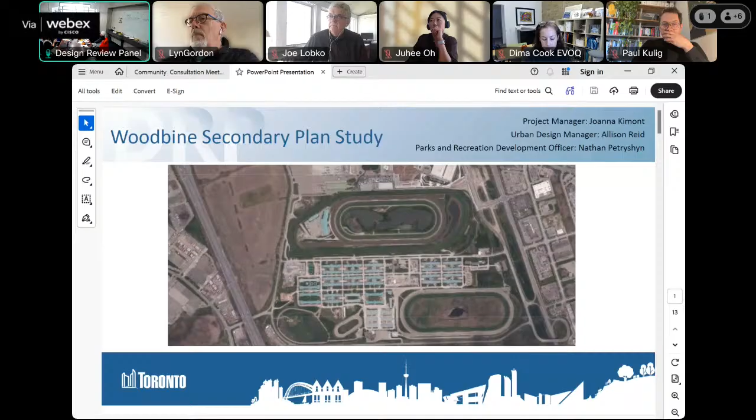To provide a quick overview of exactly why we are doing this study and how the study is being undertaken: it is undertaken by City Planning, and the secondary plan study specifically focused on the southeast corner of the larger lands that are commonly referred to as the Woodbine lands. Those larger lands are bounded by Highway 427 on the west, Rexdale Boulevard on the north, Highway 27 on the east, and the rail corridor towards the south.

In terms of the overall history to describe why exactly we're here today, it's important to first highlight that the entire Woodbine lands were previously designated in the city's Official Plan as employment areas. In 2023, when the city was undergoing its last comprehensive municipal review, various landowners were putting in requests to convert their employment lands to sensitive uses. The owner of the Woodbine lands had submitted a request for the entirety of the Woodbine lands to designate them from employment lands to mixed use or regeneration areas.

Later that year, City Council had adopted Official Plan Amendment 653, which considered the various comprehensive review land requests or land conversion requests. In the case of the Woodbine lands, it converted just the northwest corner of the Woodbine lands, and retained the southeast corner as in the previous employment lands designation.

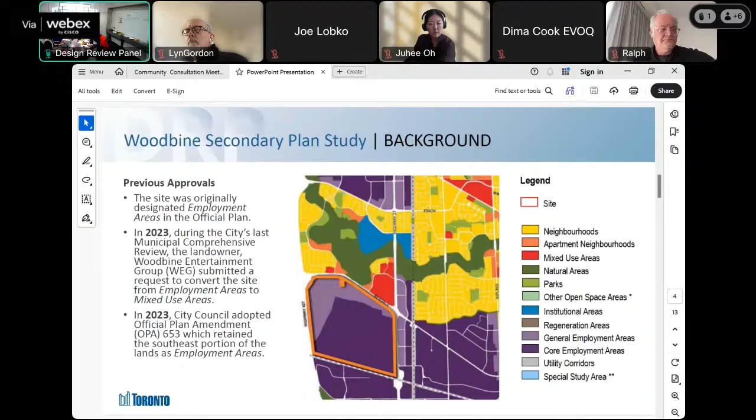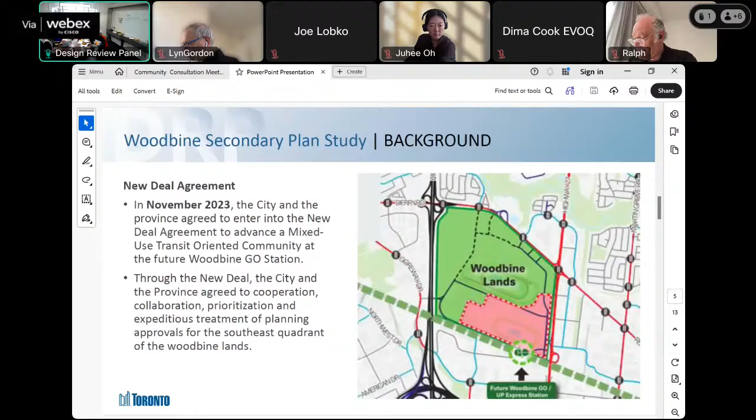However, in November of 2023, the city had reached a New Deal agreement with the province that considered a number of big moves across the city, including the Woodbine lands and some other areas focused on introducing new mixed-use transit-oriented communities. The focus on the Woodbine lands in particular was based on the catalyst of the development of the new Woodbine GO station. Through the New Deal, the city and the province had agreed to cooperation and collaboration, and really an expedited planning process to consider a new land use designation on the southeast quadrant of the Woodbine lands.

In January of last year, the Minister of Municipal Affairs and Housing approved modifications to the original OPA 653 to allow the change of uses in the southeast quadrant of the Woodbine lands to mixed use areas and regeneration areas. This was done in coordination with the Site and Area Specific Policy 896, which helps redesignate these lands. The key area identified as regeneration areas is represented in brown on the map before us.

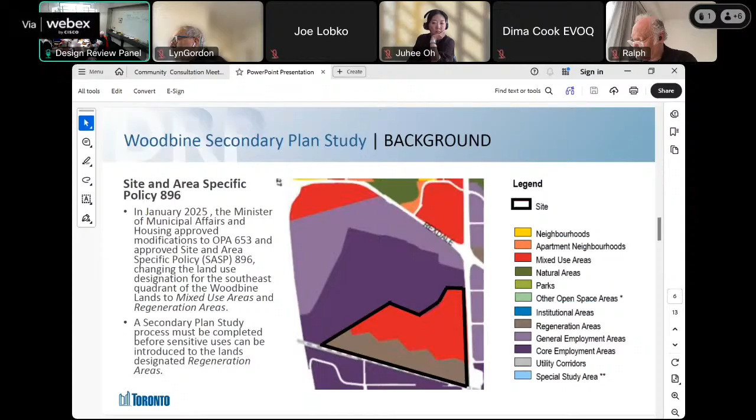The Site and Area Specific Policy specifically states that before any sensitive uses can be introduced to the regeneration area, a secondary plan study has to be completed. And so that's where we are today.

In terms of the overall secondary plan study process, this began in November of last year. Through the New Deal agreement, there was an agreement between the city and the landowner Woodbine Entertainment Group that Woodbine will be submitting all of the supporting and background materials to support the city's secondary plan process. Those materials were received by the city at the end of November 2025, and that was the initiation of our secondary plan study process.

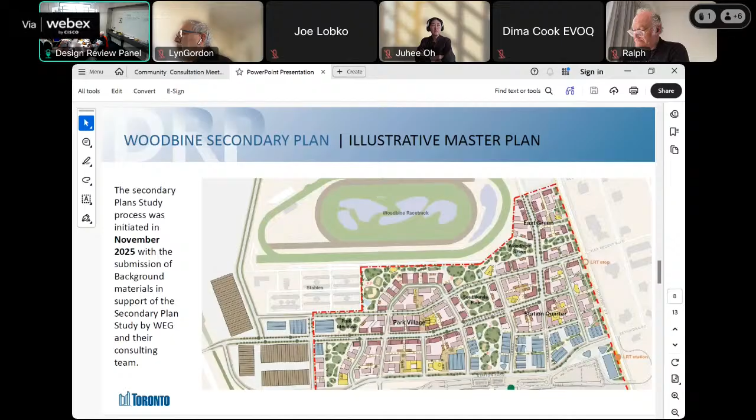In terms of where we are with the overall phasing of the study, we're just completing phase one, which began with the initiation of the secondary plan study upon receipt of those materials. We are in the process of establishing key principles to help guide the secondary plan. Those key principles were initially presented to us by the Woodbine team and are really the framework of how we're approaching a lot of our review of the materials.

Those will go into greater detail when we have the proponent's presentation. We're in the process of collecting our population and demographic data to determine the types of community services this area will need, and we are also assessing the infrastructure and transportation needs. There is a concurrent infrastructure master plan and transportation master plan being worked on alongside the secondary plan.

Part of phase one, we also just completed a set of community engagement earlier in March, and community engagement is intended to continue throughout the process of the secondary plan.

We are now entering phase two, where we're analyzing the various alternative options, particularly related to the infrastructure and transportation master plans. We're developing the draft vision statement and key secondary plan directions that will be reflected in an interim report intended to go to the May meeting of the Etobicoke York Community Council.

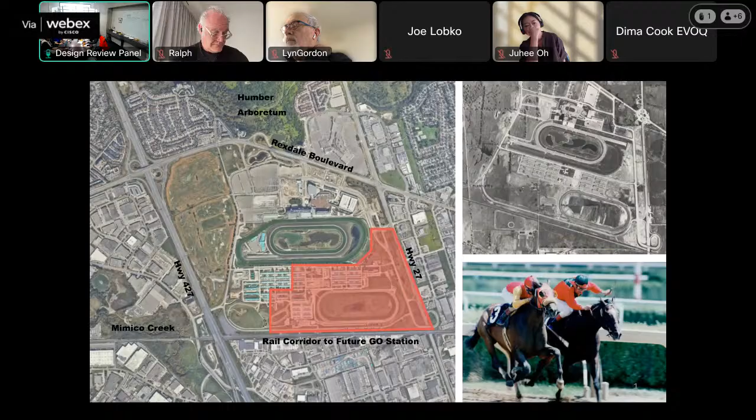Today we will be discussing the southeastern portion of the site, which is within the secondary plan study. There are also ongoing plans to the northwest, and in the southeast that will be in parallel. The idea is that ongoing development all supports horse racing operations for its future within the site and across the campus.

This is conceived alongside these other respective neighborhoods that are to be connected in the wider Woodbine site area, but also beyond. Having a variety of mixed uses is important in the coherent plan for all of the site area, with horse racing at the center. This is a cultural institution that has had a long history in Toronto and for the site.

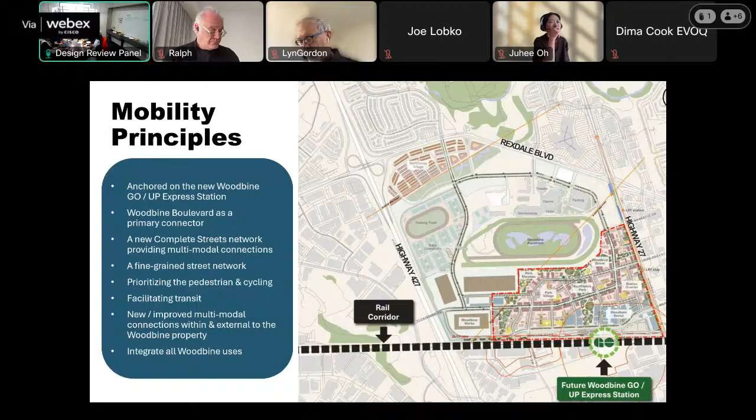Working with BA Group and the wider team, we have set forth a number of mobility principles. This was included in the preview deck. In the interest of time, I'm not going to go through all of the bullet points, but that is working in concert with the infrastructure master plan, as well as the environmental assessment, as well as the design for the master plan.

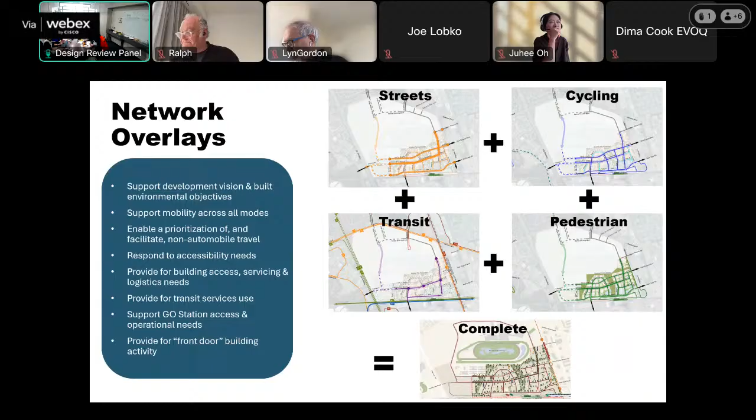There are a series of in-depth network overlays that we're looking at in terms of pedestrian-focused street networks, cycling, and transit, to come together as a complete network and a complete community. These parallel processes work with the TMP and the EA, thinking about not just within the secondary plan boundary, but as wider reaches within the Woodbine site and beyond.

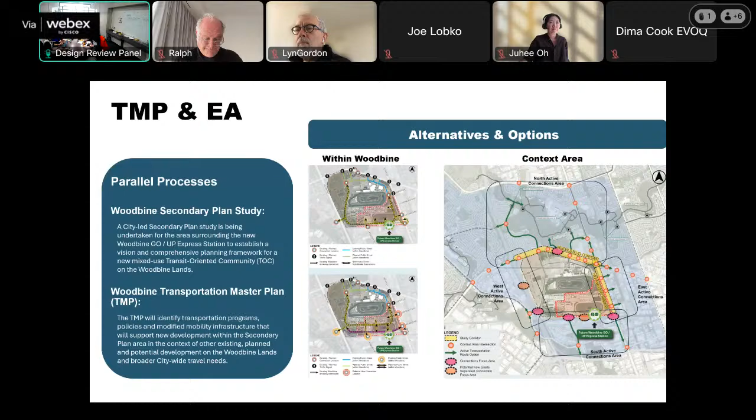So today we're focusing on this southeastern quadrant. I will describe the 3 neighborhoods that form that quadrant, and how the street network and the network of parks and open spaces work together to create what we see as a long-term legacy for the site.

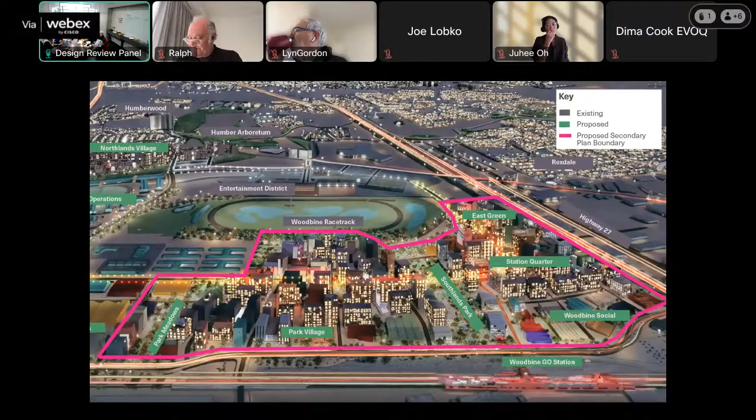As Joanna stated, we have been working together on really a charter of 7 principles, thinking about open spaces, the parks and squares, and creating a balance between natural and built elements, grounded in Indigenous principles that we're listening and learning about. Alongside that, there is a connected network of streets, routes, and thoroughfares to foster the urban life that happens in these communities.

It is important, as a site of this size will be developed over many years, that the blocks are rational, the right size, and the streets are the right widths. We're looking at diversity to be resilient across the neighborhoods, being flexible, and also being complete at every stage to minimize disruption, but in particular, for Woodbine itself, to be a place of its place.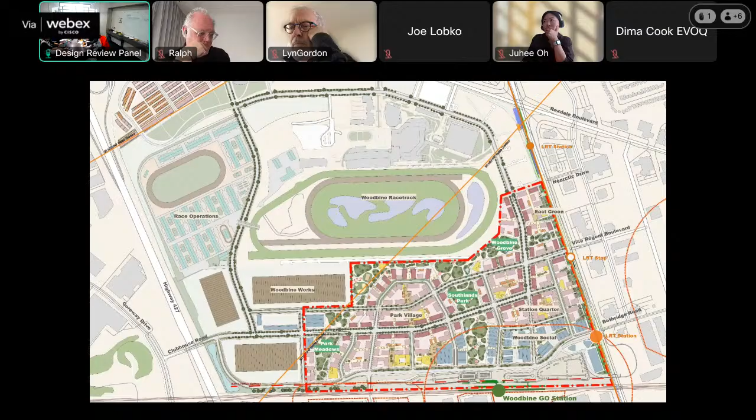As touched on, there is a limitation in height. So this is a great opportunity to deliver mid-rise communities that are mixed. We have a limitation of 16 stories, but we're not proposing 16 stories throughout. We are looking at a mix of typologies ranging from low-rise all the way up to about 16 stories.

Back to the open space network, the parks work in concert with a number of smaller green spaces and pocket parks, as well as mid-block connections. The idea is that the pocket parks and more intimate, smaller green spaces offer a different quantum of space, when we envision the variety of activity, not just general games programming, but also enjoyment as family parks throughout the seasons and throughout the year.

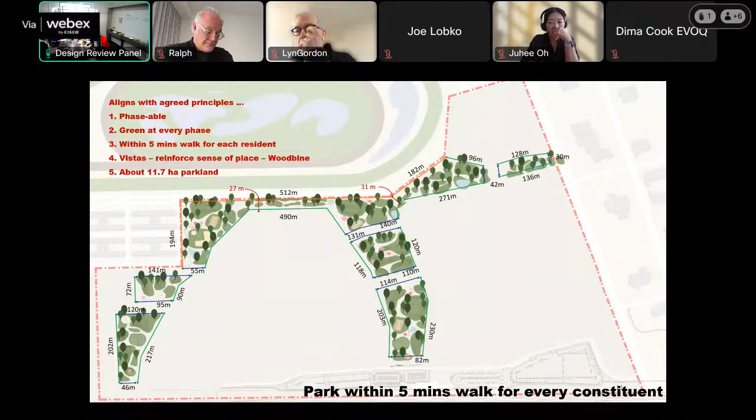We will come back to this slide. There is a set of dimension slides we can review if the panel wishes to delve into more detail. But the idea is that each of them will be within a 5 minute walk. This isn't set in stone, but it's an attempt at envisioning how these parks would work, how it would work in terms of programming, informal play, and the scale, from a tennis court to an American football field, and how it fits in these parks.

We're looking at a park average width of about 150 meters across in depth for the main Southlands Park. And it's not just about how it's programmed above grade, but also how it works below, thinking about stormwater drainage and that ecosystem working throughout, with geothermal incorporated across the site.

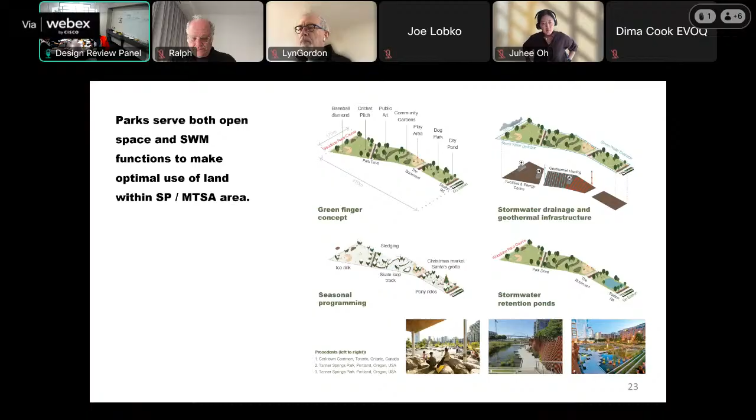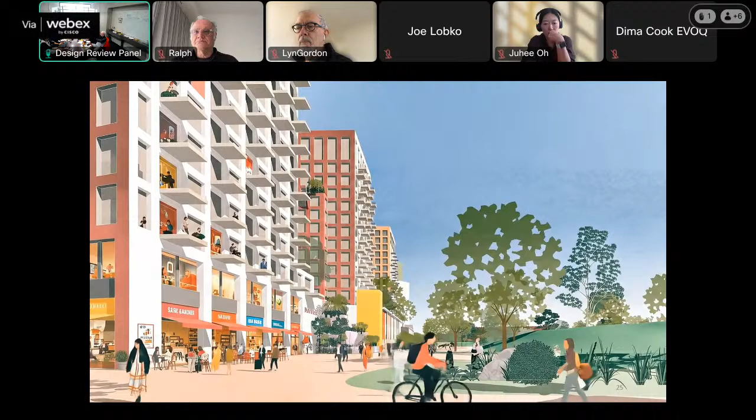We're really thinking about a new way of enjoying these parks, not just driving up and parking against it, but also encouraging walking along the edges. So we thought, to best optimize the site, we are looking at public footpaths not being encumbered by parking for the development plots. I'll go into more detail about the depth of the ribbon block typology that interfaces the park.

Alongside Woodbine Boulevard, in concert with the parks, we're looking at pocket spaces which could be civic squares that also have sustainable foundations, thinking about how that works with the transit network, those green connections, and integrating blue-green infrastructure.

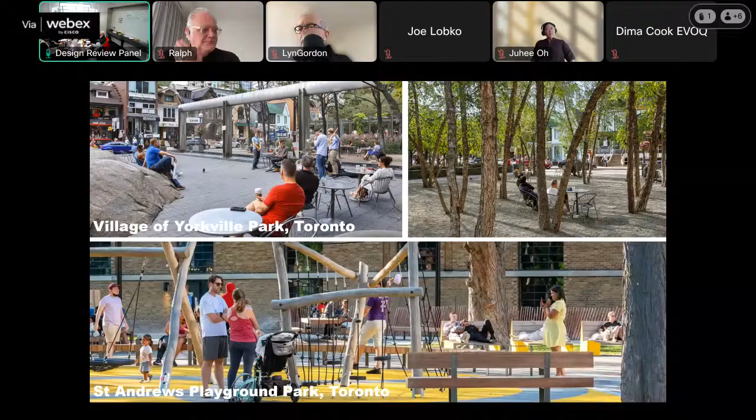That also extends to the smaller, more micro parks, local pocket parks, thinking about small children, daycares and nurseries, and how these smaller, more intimate spaces would be more appropriate for the neighborhood, working with the city staff team to dedicate some space nestled within the neighborhoods for that. Toronto has a history of very successful parks that work really well within the urban context.

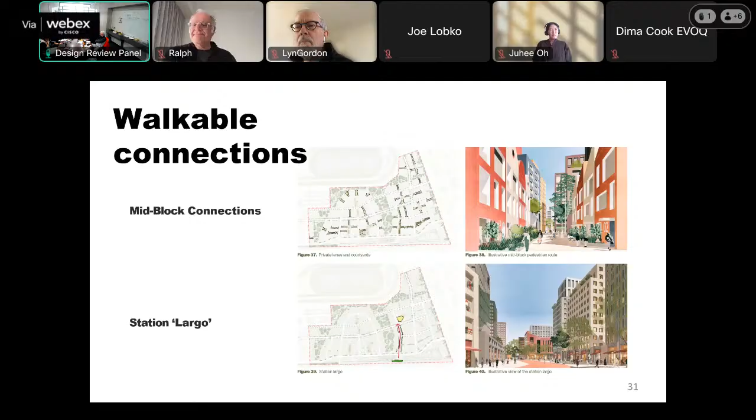Linking those pocket parks to the larger park are mid-block connections, intimate connections between the urban blocks, but also a significant one, the Station Largo, which connects Woodbine Boulevard to the station itself. This is an illustration of that more intimate mid-block connection that encourages cycling and pedestrian walkability across those neighborhoods.

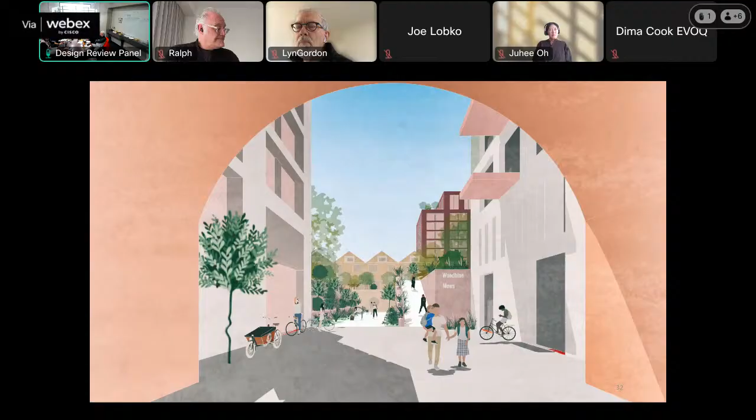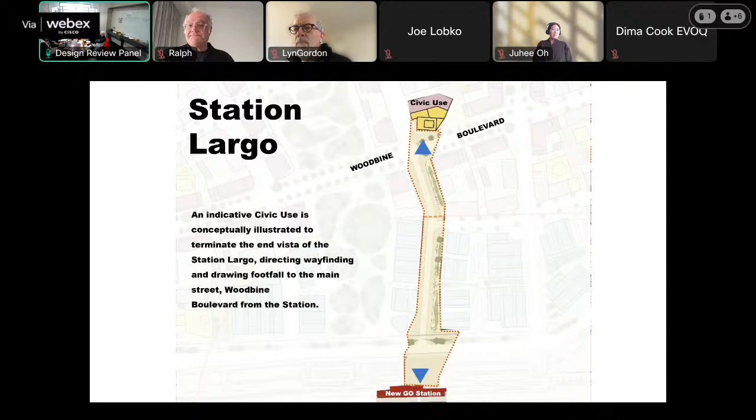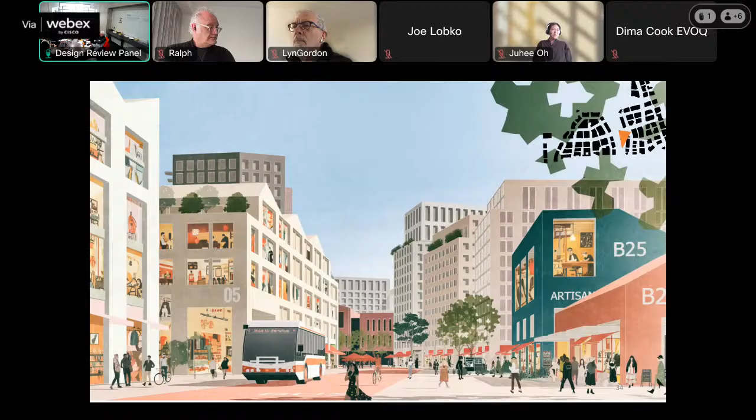For the more civic piece, the Station Largo is really trying to anchor two pieces of civic built form, having civic use at Woodbine Boulevard as one goes from the station towards the Boulevard. This is an illustration of what it could look like, encouraging the use of transit and walkability.

Of course, this is bolstered by thinking about the hierarchy of streets. Not only do we have Woodbine Boulevard, but working with Alan and the team, thinking about local streets, this Park Drive towards the north, and service streets, station streets towards the south, all connected together with a loop road, which forms what we call a petal, one of the urban structures of these neighborhoods.

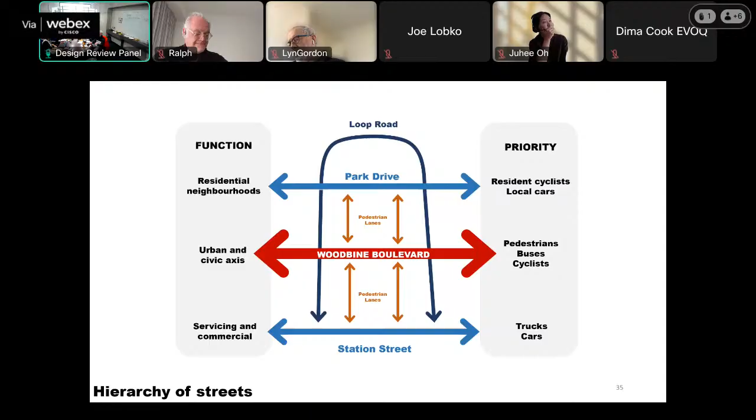There are more intimate pedestrian lanes that knit between these three spines across the neighborhood. In right-sizing the width of those streets, we thought about the hierarchy: Woodbine Boulevard being the widest at 36 meters, the transit mall at something like 23, and local streets down to 20.

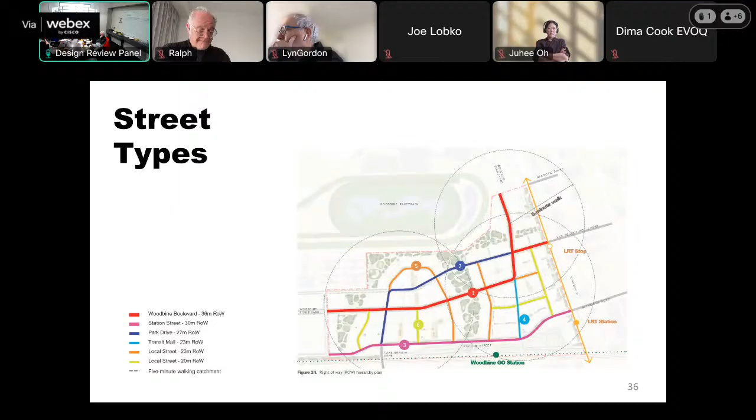In right-sizing the streets, we're also right-sizing the blocks, and they both work in concert, thinking about the activation and what are fronts, what are backs, to enable it to be as functional and workable as possible. Across the three neighborhoods, we're looking at 5 character areas.

The areas around the periphery of the park are ribbon blocks, and I'll talk through that typology. Where it interfaces Highway 27 at the eastern edge, we have edge blocks, which take on a different block configuration. Then within the middle of the neighborhoods, we have central blocks, which are larger, more generous, with a bit more room to account for different typologies and configurations.

Along the southern edge, we have planned for non-residential use or flexible mixed use in some instances to encourage that transition between the station through the residential neighborhoods and buffer against some of the environmental constraints, particularly towards the southeastern sites.

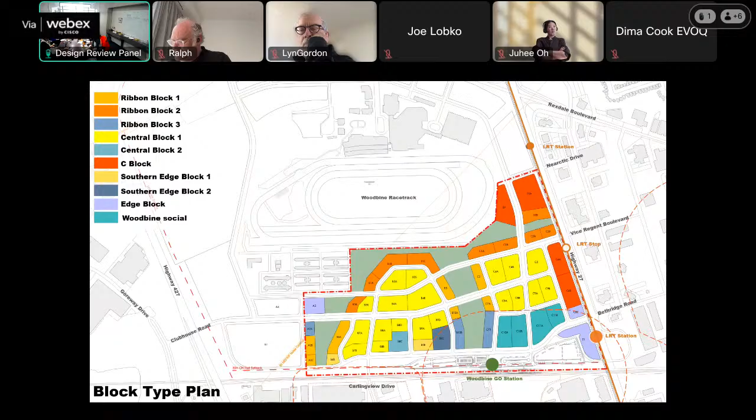All of this plan sets forth different block typologies, which we looked at in detail. For each of the blocks, we've anticipated, working with others, the ground floor, a typical floor, looking at a mix of typologies, mid-block connections in between, testing the environmental qualities between these blocks.

I'm pleased to report that we've tested the park spaces, and all of the parks achieve in excess of 5 hours of access to 50% of parks and solar access for all large park spaces. It's performing really well, and predominantly this is because this is a mid-rise community. It doesn't have the kind of shadowing impacts that one would typically associate with denser urban environments.

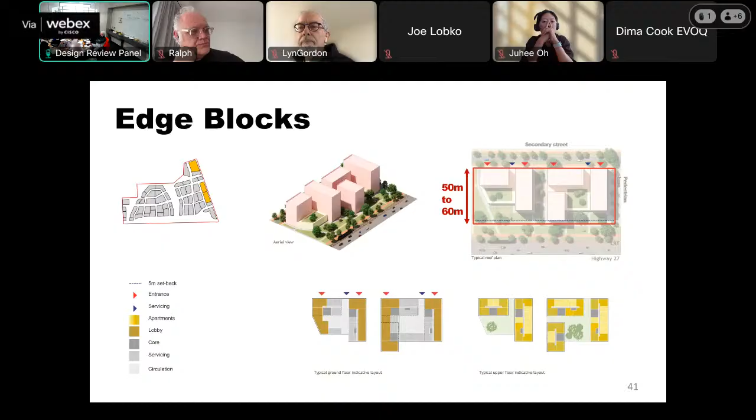Towards the edge blocks, we're looking at a 50-meter deep block, also being able to anticipate how we use landscaping to buffer to some of the noise and perhaps the environmental qualities of Highway 27 towards its eastern edge, and also studying how these blocks can be serviced, how we can plan for good quality apartments around grade.

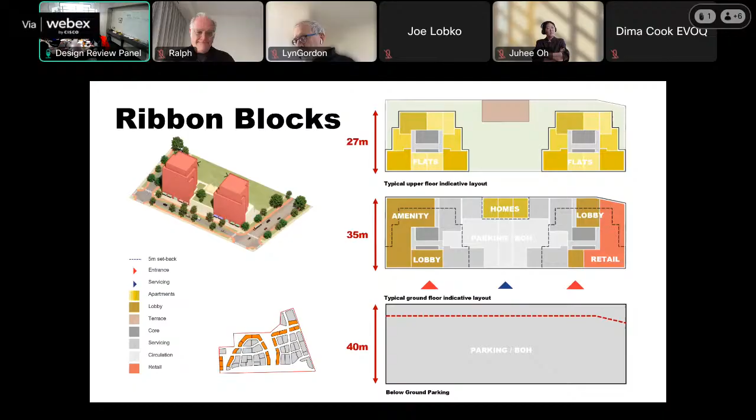The ribbon blocks are more narrow - they're 40 meters, around 30 meters in terms of built form. Again, we've studied this with the help of others, looking at how it is serviced, how we can lay out plausible parking that is necessary for some accessibility needs, to ensure that these apartments are the best quality that they could be.

So we can pause you there - I know you've got a few more slides to go. Okay, we're at 20 minutes, but we've got a little bit of buffer, so you've got about 3 minutes. All right, thank you, Michael.

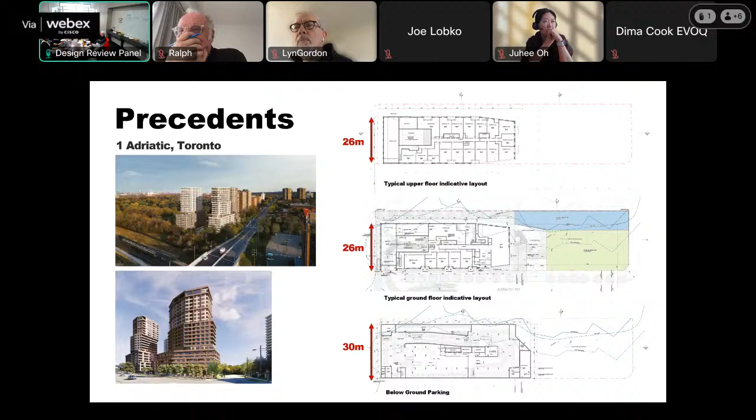We've looked at many precedents across Toronto - Maple House we've been familiar with - also to understand what works in what we've designed for the site, looking at 1 Adriatic by Superpool, thinking about how in tight urban sites that could still function with one point of access on one street, and being able to provide good quality residential environments to street frontages for the neighborhoods.

This works in concert not just for the residential buildings themselves, but also alongside civic buildings, and accounts for the different types of workspaces and office buildings, really setting the tone of a clear street hierarchy across the site.

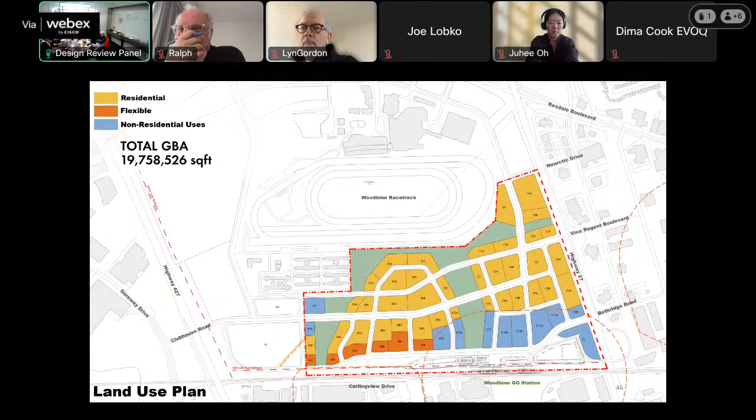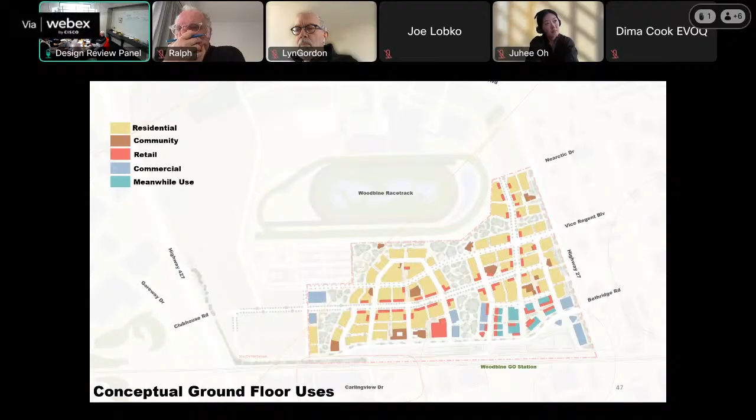The land use plan is really informed by thinking about these typologies across the site, and thinking about concentrating retail and activation along Woodbine Boulevard and where it matters most across to the station, where we have the greatest levels of animation.

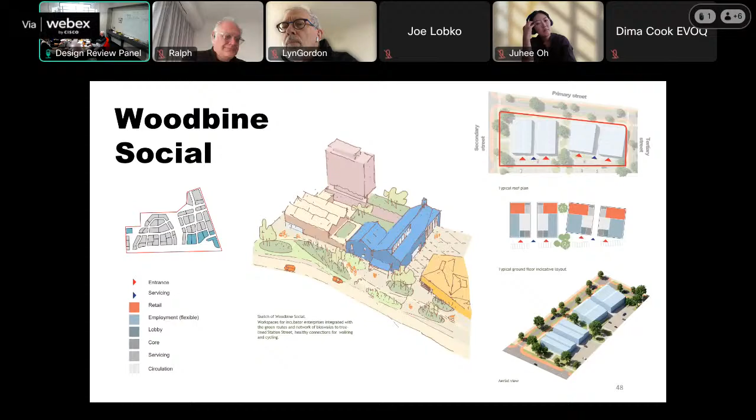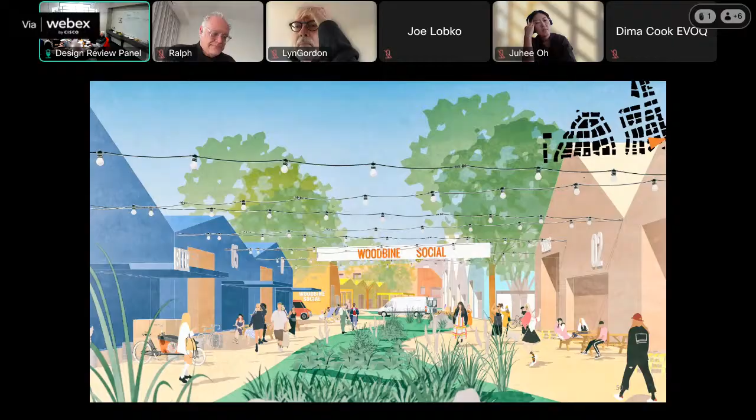Woodbine Social itself we see as a very exciting campus of incubator spaces for incubator enterprises, to allow for that very quick, immediate programming around the station, to give it that sense of interest and provide the amenities for all those arriving at the station. This is an illustration of how it all comes together, a balance of, again, taking the walkable routes all the way through towards the station.

We've studied a number of precedents that are well loved, both here in Toronto and in Vancouver, Copenhagen, and even the one we worked with before in London.

All of this has fundamental principles in terms of phasing. It isn't a small community - we are looking at 20,000 homes within the site area. We're dedicating 54% of the site area to open space, integrating 16 million square feet of residential, about 2 million of employment space, with a host of civic and community spaces for about 35,000 residents and 10,000 jobs.

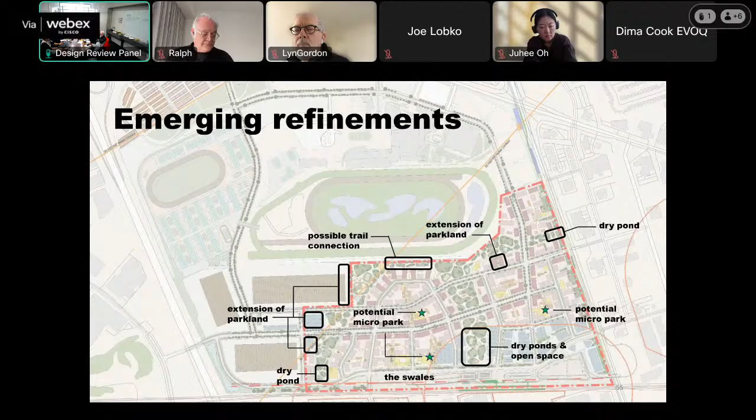We've had a number of collaborative city workshops. We are evolving the plan and still looking at emerging refinements, increasing areas of parkland but without losing the urban structure of what we're proposing here, thinking about how stormwater drainage works across the site.

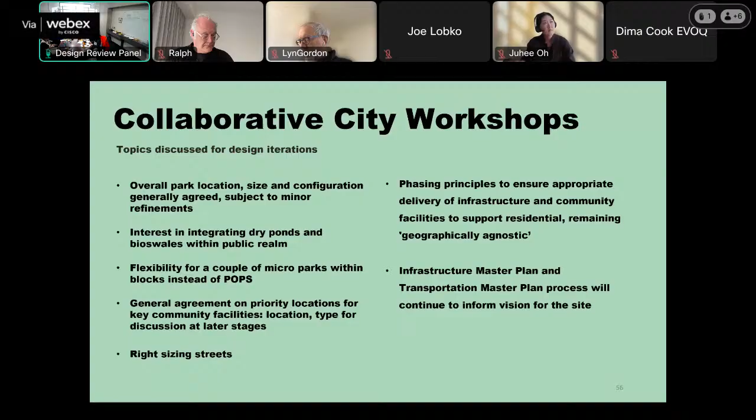We have an overall park location, size and configuration generally agreed with the city team, thinking about the interest of integrating bioswales and dry ponds across the site, thinking about how POPS work and working alongside the mobility plan. And here we have Woodbine, and hopefully in time to come, it is a complete community.

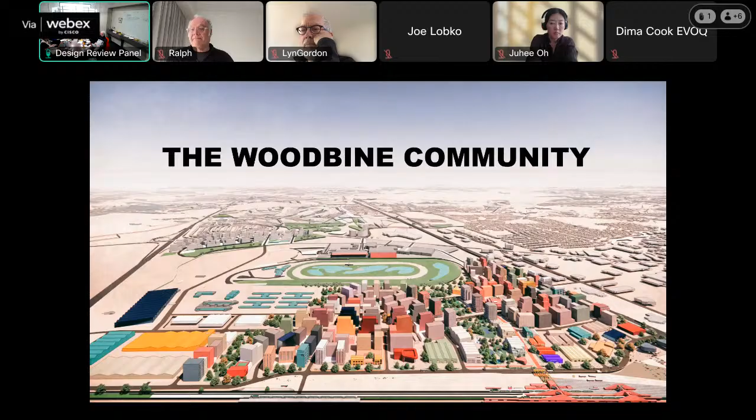Thank you. Thank you very much.

Panel, we have an opportunity now to ask the city and the proponent questions of clarification. So I'm going to look for hands here and on screen. I see Paul, Jim, Joe, and Heather. Paul? Oh, and Judy. And Ralph.

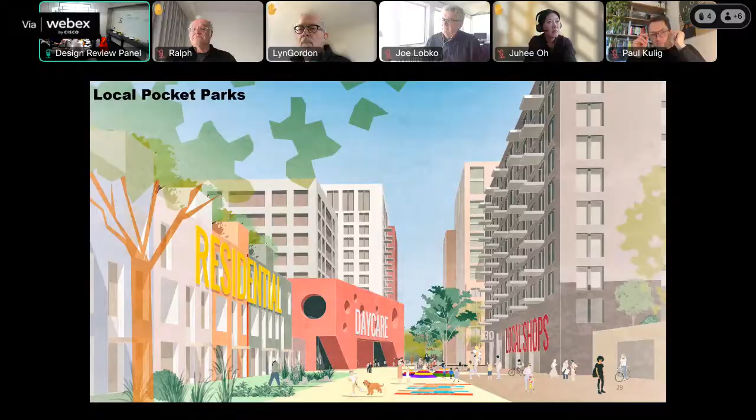Maybe I'll begin with the various community services. So far the plans prepared by the Woodbine Group show potential locations for community and civic uses. The city is currently undergoing a needs assessment to determine the various types of community services needed in order to achieve a complete community.

In terms of potential co-location of a school with a park, perhaps Nathan would like to address that. That's something we haven't entirely landed on for this area. With TDSB, I've had conversations about this area and what their needs are going to be, and they typically look for a more urban form of school. We're having conversations more generally with Parks and Rec and TLC to understand what it looks like to have lands adjacent to parkland and what kind of programming synthesis or opportunities might allow some synthesis between the two uses, similar to community learning.

Joe, does that answer your questions? No, well, it starts to answer. I gather there is no idea yet of where the schools are, or even if there will be some, given the isolation of this community overall - that's a critical issue. But this issue of how you actually deliver on the idiosyncratic form, I'd appreciate an answer to that.

So on that, the secondary plan will include policies to ensure there is a diverse built form typology. One objective the city has is to ensure we do not have just uniform typology across the site. The secondary plan is intended to work closely with urban design guidelines developed as part of this overall process, which will provide greater detail on individual blocks and the type of typologies that could occur within those blocks.

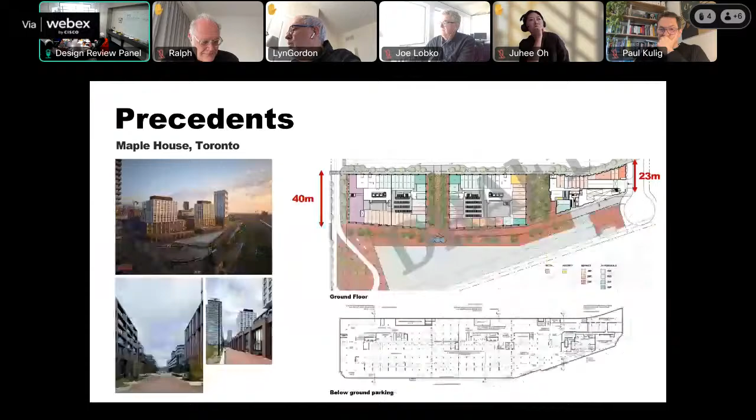And I know there's more labels on it now, but before in our package it was noted as kind of circulation. These are deep blocks with a lot of back of house that are 1.5 to 2 stories tall in a lot of places with amenity on top, it would seem. So it's a different typology than we're used to seeing in the city, with amenity spaces on podium roofs that are much higher. So I'm just wondering if you could speak about that typology a little bit more.

So in some of the central blocks are deeper, to allow for mid-block connections and a mix of typologies - townhouses, duplexes, as well as taller rises. The areas, the ribbon block and the park edge ribbon block, there's two different types. These are more mansion block.

We think that because this is a much more civic park compared to Maple House. Maple House takes on much more of a C shape, so they're deeper to allow for some of those amenities. And we think, in our observations traveling and looking at other cities, having amenity for the residents in close proximity to the parkland actually extends that parkscape in terms of enjoyment of views, cross views, and light and access to the apartments themselves.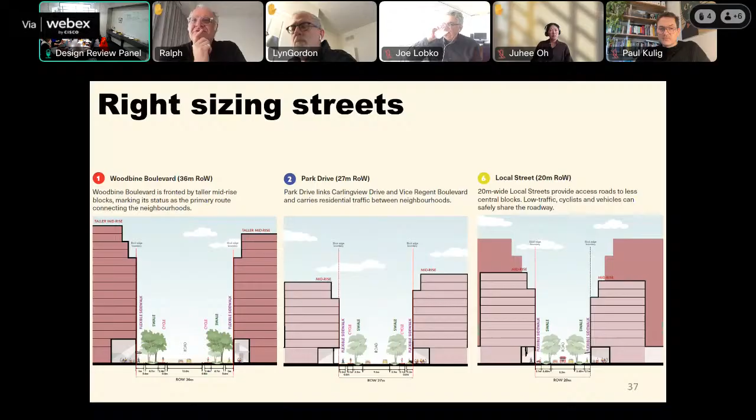It's a pavilion, not a carbuncle. Okay, yeah, I know, I didn't mean that as a bad term, that's just what came to me. So Ralph, it's this one here, can you see my arrow? Yes, oh yes, the little pavilion there in the middle part. Yeah, I mean it's illustrative at the moment, but working with the city team, the anticipation is maybe, perhaps because of its prime location and adjacent to the track, it could be some kind of observation pavilion of some sort. But that's to be discussed with the parks team.

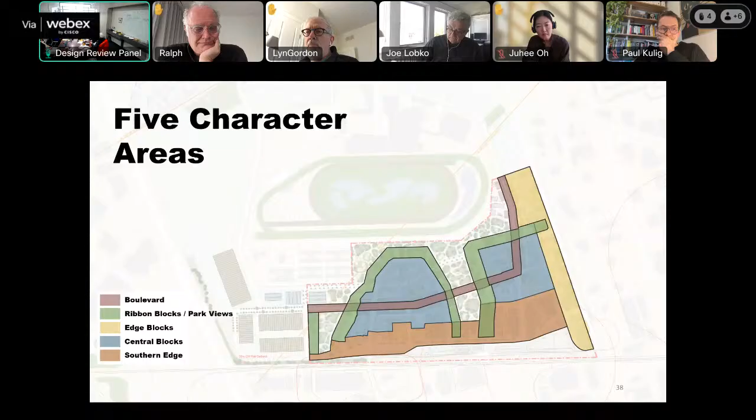Hi, Ralph. So Woodbine, as Angie mentioned, I'll call it a lowercase nonprofit because it operates as a nonprofit in the sense that all of the revenue from the program you're seeing before you goes back to the Ontario horse racing community, and that gets distributed to them at Woodbine and across the province of Ontario to support. So in terms of developer, like we are not a developer, a capital D developer. We're working on behalf of a horse jockey association to keep that sport thriving in Ontario, not just at the site. So naturally, the short answer is phase by phase.

We would work with builders and developers. We call ourselves a master developer, kind of lowercase m master developer, putting this all together. But we're in control of the phasing, the blocks, and then we would bring in execution partners like Tridel, Fram, like all the regular people that know how to build. So we don't have aspirations to become a construction company, but we are taking the role of kind of master developer, and it depends on a per block basis. A lot of what we're trying to do, given the market and our ambition, is obviously rental, so we would partner with those types of organizations.

Great. Okay, so just quickly going through Woodbine Social, I'm going to ask a little more particular question. Can you please describe what a meanwhile use is? And then could you mention its longevity, tenure? Is it meanwhile meaning temporal uses that will get redeveloped over time, or is this a permanent amenity to the site?

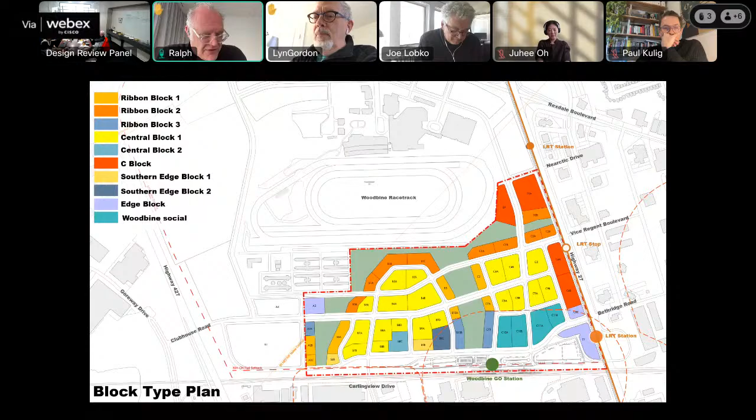You show retail - I'm looking at the conceptual ground floor uses. There's generally a typical size and depth across 90%, and then there is one very large red block. Can you describe the amount of retail, how much retail there is? You have a stat sheet, but no idea about how much retail.

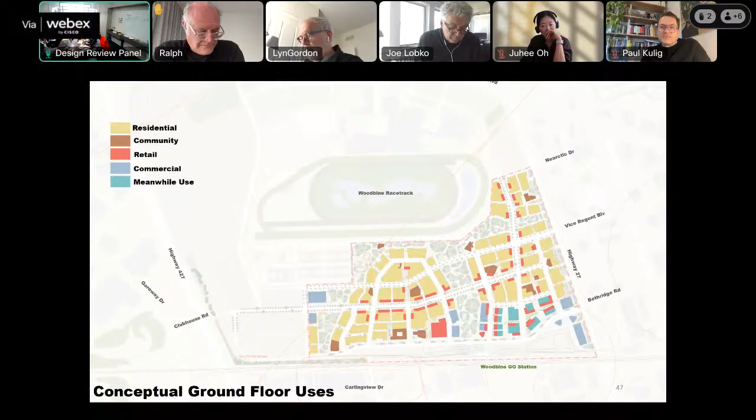A little bit about what that retail is that is so exceptional. I don't have the exact number for the quantum of retail, but we can provide that as a follow-up.

In terms of the depth of retail, we're looking at, along Woodbine Boulevard, a one-sided frontage to allow for a suitable 6-8 meter depth. Ralph, you'll know more than me in terms of optimum depth for activation for retail. The large pinky block you see in the southern extent of the neighborhood, Park Village, is anticipating a very large food store or retailer to serve the needs of that community.

Last question - I know you mentioned there's flexibility in the plan, which is very admirable. Given the size of this plan, in order to deliver flexibility, infrastructure has to be placed, so I'm assuming this is phased with phased infrastructure. Can you give me a high level picture of how the phasing strategy is going to work? Which phase goes first, at least at this moment, given the servicing costs?

At this moment in time, we don't know - that is the honest answer. We have some ideas, but it's just too early. But the idea is that as every phase gets built, or at least a neighborhood gets built, a park gets built - yes, that is the idea. We essentially see infrastructure as investment; we don't want the routes of that infrastructure to change and be dug up.

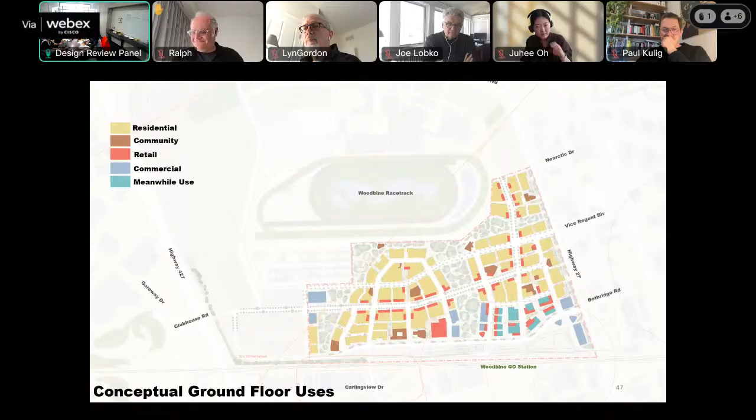Dima? I apologize, I lowered my hand but did not unmute myself. Ralph had asked my phasing question. Maybe related to that is...

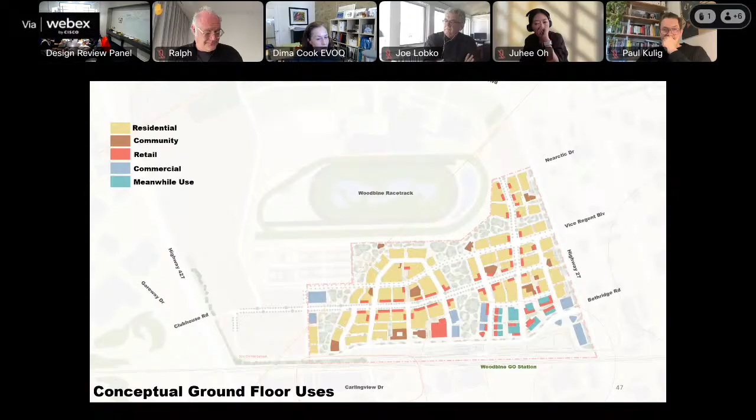There are mid-block connections indicated, but it's not clear to me in the block diagrams or massing models how the mid-block connections relate to servicing for buildings. Are the mid-block connections also going to be servicing for buildings, or are they purely pedestrian? At the moment, as illustrated, they're purely pedestrian because we've tested the blocks and they have enough street frontage for access of servicing. There is a hierarchy in terms of those street frontages - the main Woodbine Boulevard ones tend to be primary fronts, and within the guidelines we would discourage servicing from those main arterial routes.

And maybe one last question - in terms of sunlighting, you spoke about sunlighting on parks, but was there a study done to understand sunlighting on streets? Yes, that is ongoing - we are testing that as we speak. Thank you.

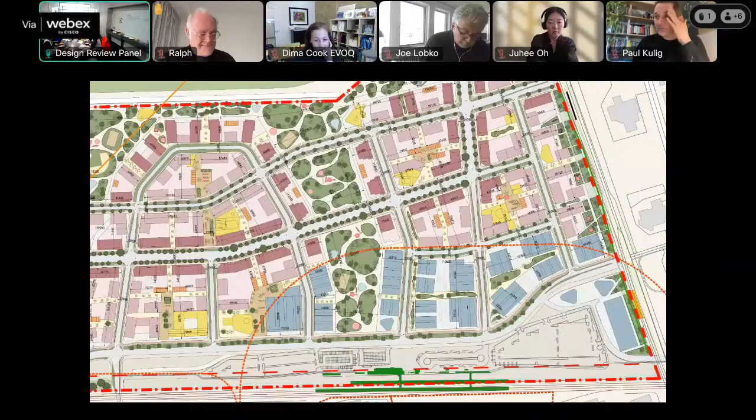Thank you, Dima. Thank you, panel members. So remembering the questions, we'll be back a while in our conversation. We were asking about missing guiding principles, things we could add, comments on park structure to observe and improve the park structure, and are there elements still not yet described that might be needed to improve the overall plan being proposed? That's my summary of what the questions were.

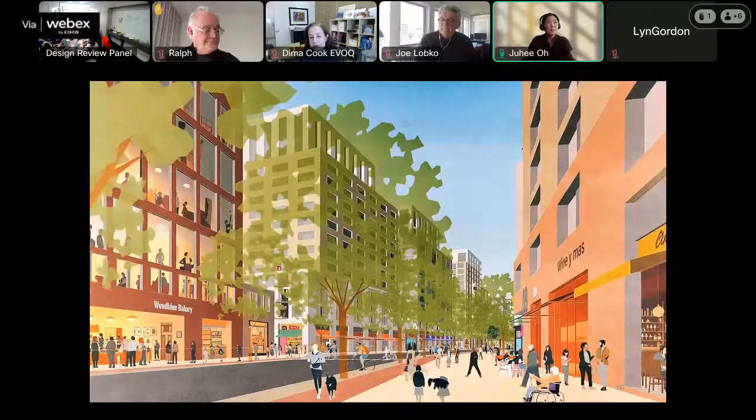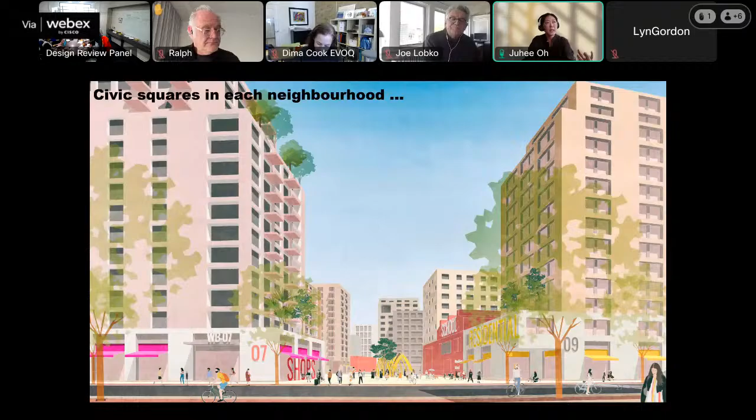The 7 principles set a very ambitious vision, and I thought it was a really strong starting point. Currently, few of them remain largely open-ended and open to interpretation. I can see this has started to be pushed further and tested. On page 43, there were clear definitions starting to emerge in the phasing principles for the development, which is helpful to see the direction of travel you're going. But as we all know, the master plan will unfold over very long time horizons, moving across multiple phases, teams, ownership, and developer cycles. I think the principles can remain flexible, but they should be testable.

It should be clear enough that anybody who comes and goes through the entire development pipeline can say, 'we're no longer meeting principle number 4.' I think that can be done by pairing very small, clear outcomes or red flag tests to ensure the original vision you have created here will guide future phases as decision makers come and go.

And what happens if two principles clash with each other? Which one will win? Do we know? Again, that makes it easier for the city and everybody, since I think this project will go beyond all of us, to make sure the vision we have set today is still upheld.

So for example, principle 2 speaks to connecting and creating streets that function as both thoroughfares and destinations. Success of this principle could be measured along walking, cycling, or transit access, not only within the site, but also with the surrounding neighborhood.

A potential outcome test could be: has the plan delivered continuous barrier-free pedestrian and cycling routes in the early phases? At the moment, when you look at the diagram, cycling appears to be accommodated everywhere, which raises an important question: should cycling be prioritized along certain corridors, or should pedestrians be prioritized among others? These modes move at different speeds and serve different destinations. Clarifying these intended outcomes will make it much easier for you to prioritize how these streets will function and support each other.

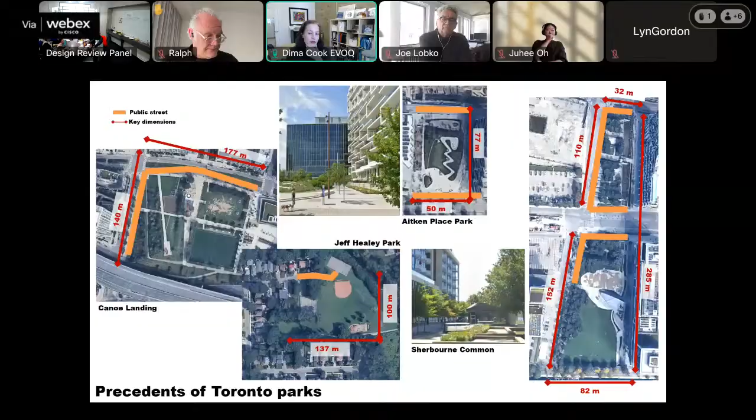One issue in this neighborhood is everywhere you go, you're going to hit a border. To find one way where you hit a border, you circle up the park and come back around, so you actually create a strong green loop rather than going up, hitting the racetrack, and bouncing off a rigid border between the rail lines, Highway 27, and the racetracks. So I'd encourage you to turn Woodbine Boulevard into a much stronger linear park and create that horizontal link. Beyond the swales along the racetracks, having a more urban green connection would help create this sort of center in the area.

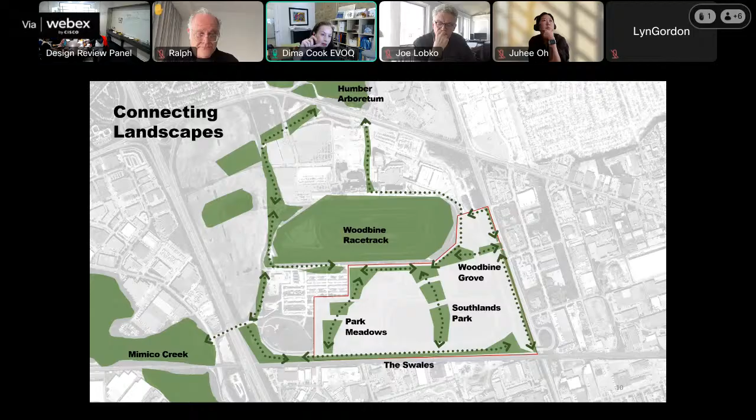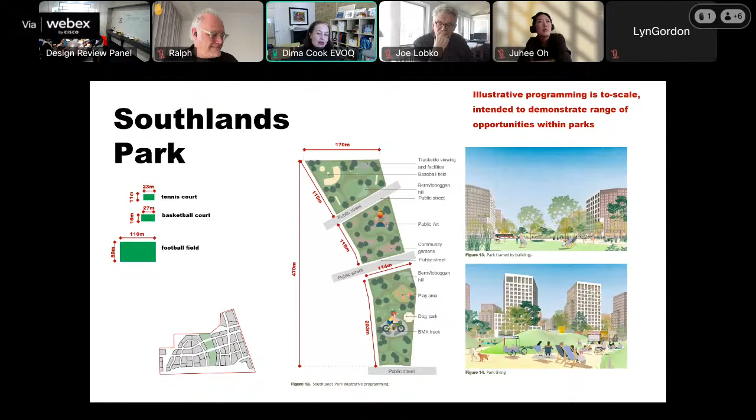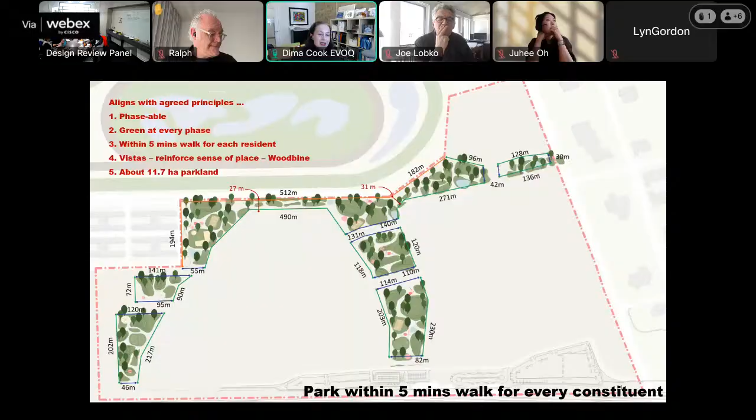One last item on the green spaces—looking at the sizing in that slide, which I don't think was in our package, looking at the size of tennis courts and various sports fields, I wasn't sure a soccer field would fit in the area, so I'm not sure they have one, much less two. Unless I missed it, there are some functions—like a soccer field—where looking at the parks and thinking how more mundane rectangular functions could fit into some of the spaces critical for community activities would also help.

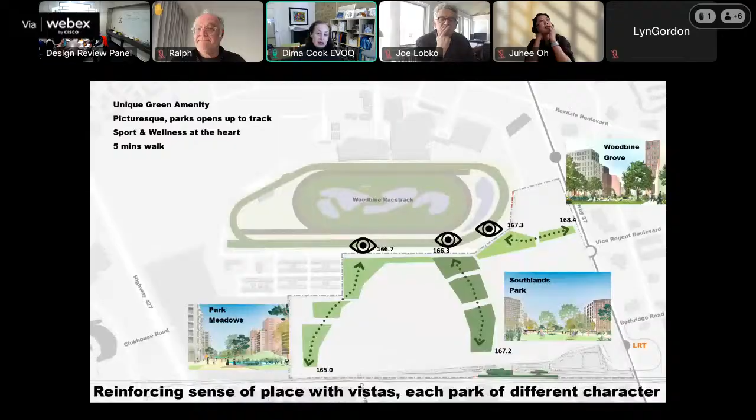But on the whole, there's a great ambition in this project, and it is certainly aspirational in its intent, and I would really encourage it to continue forward.

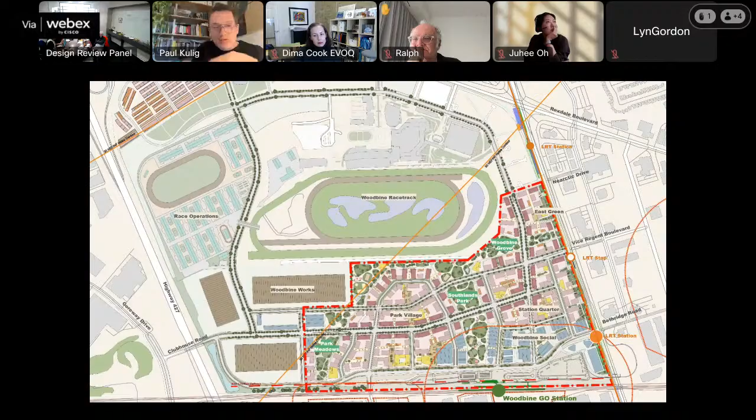The space in between those two is huge. I did a quick check, and the one that stood out is Stanley Park, if you know it—the sequence that goes from Adelaide through King Street to the Wellington rail corridor and beyond. That scale of park, and its disposition being bisected by east-west streets, is something we could look at.

So really about consolidating some of the destinations, the community hubs, the parks, and some of the retail in a more conscious way. Right now it feels like there's sort of multiple competing public realms between the streets, the park network, and the mid-block connections.

I want to make sure we're not spreading ourselves too thin, establishing more of a hierarchy or concentrating those things. Then just lastly on the built form, I touched on the ambition of the mid-rise, really appreciate that. I think the blocks are good. We're starting to get some longer blocks, we saw that with some of the later districts in Downsview. But again, the question with a block like that is how do you make sure it's got active, vibrant street edges all around?

It can work, think of the Keybridge project in London, but it can also become any of the generic city place blocks that's got a car drop-off in the middle, servicing and loading and garbage pickups, and not have that same vitality. So pointing back a little to the city, a lot of the success will depend on how we deal with servicing and being surgical about parking ramps, and how we right-size loading requirements and other things to get those active frontages around the various edges we're seeing in the renderings, and make sure we can deliver them in reality as this comes through.

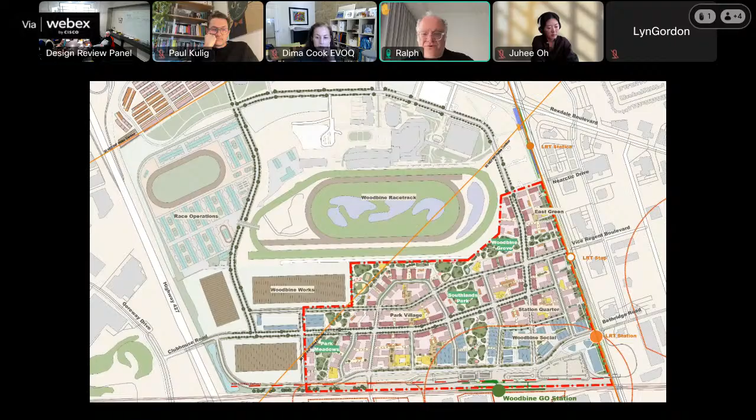I don't really think that the retail — double-sided retail on a 36-meter right-of-way — is necessarily the way to go. I think it's really a wide right-of-way. It doesn't have that intimacy that I think your images kind of deliver. So that may change the grade relationship between your built form, and become more of a grade-related retail potentially in certain instances. I'm mainly talking about the north-south part of Woodbine Boulevard — this kind of sporadic, staccato of retail, I don't think is going to deliver a retail offering.

It may deliver service retail — doctor's offices, dentists, and those kind of uses. But if you're trying to create a lifestyle retail, and Juhee, I think, talked about that, I think you need to create a cluster. The idea of nodes, I struggle, because for me, in this context, I think a node is built form, program, and space, and I don't see that in the plan.

I think there's an opportunity in the middle of Park Village. That middle node, I think, should be enlarged. It should have retail that wraps around it and creates a kind of node — a place that people can gather, where the retailers need each other and create that kind of ecosystem. That clustering is really important, and I think you can maybe get a little less consistent retail along the boulevard, and instead have more consistent commercial space.

It may become retail, but I think to conceive of it as something more destination-based. You go to the doctor, you go to the dentist - I think that's a better offering.

And then cluster the lifestyle retail around these nodes. The Largo, which I think is more of a Rambla - but I love Largo, so I'm a bit sensitive about that word. But I love Station Street. I think Station Street is actually a better retail street than the Boulevard, and I think that community space at the top of it as a destination maybe can find another location, and it maybe could be a square that you're ending at, so you have another cluster of public realm connectors and destinations in each location.

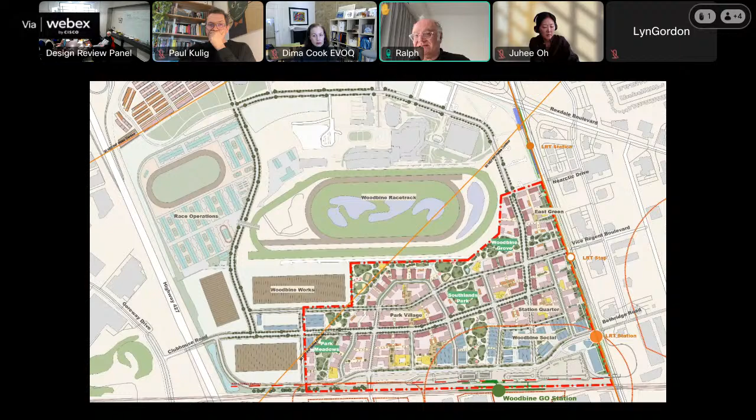Does Woodbine Social get broken down into 3 phases so you can deliver that place you spoke about, and then maybe Station Quarter adjacent to it, so there's small bites? But every bite isn't just about parks and nodes, it's about economic viability. And I can't imagine the cost of the infrastructure needed here to build these streets and all the services below them that need to deliver.

So I see it being phased, of course, and how to phase it is going to be really essential. I want to say that I just love it.

I think that big box retail - if it's a big food store, it's got 3 sides of nothing. So really got to think about what public realm you're creating around a food store that seems to not have a front and 3 backs.

I also think a 40,000 person neighborhood could have 2 to 3 food stores, different sizes, different flags, different levels of offering. So retail and commercial needs to be really embedded in here to be able to deliver it. I buy into this wonderful, accretive looking physical manifestation.

I have wounds, 25 years of wounds, of losing those battles. So I think it's going to be more than just a secondary plan, and more than urban design guidelines, if the ambition is to deliver this vision. Thank you.

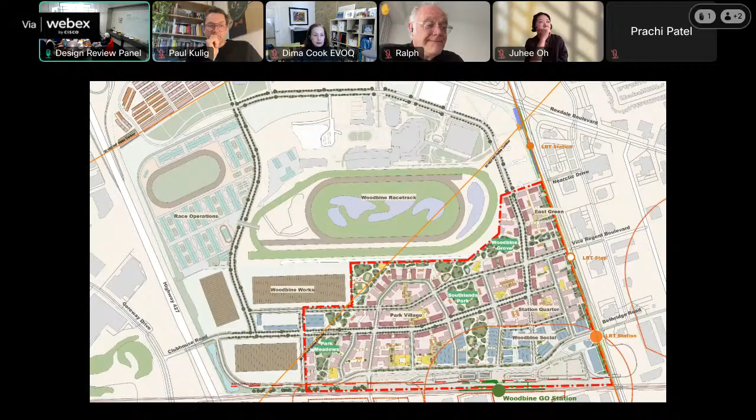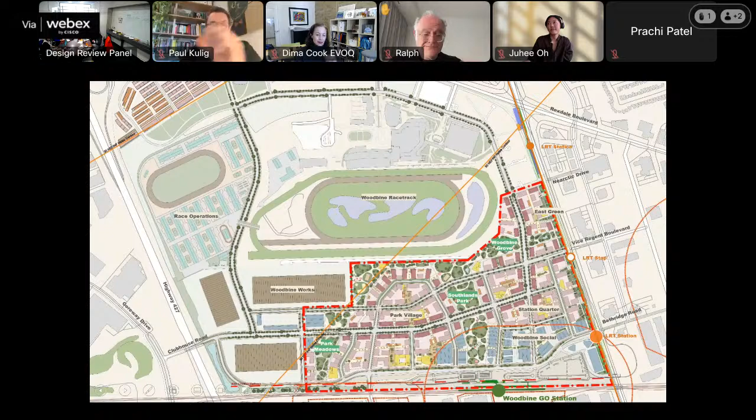Big part of the team. Meg is...